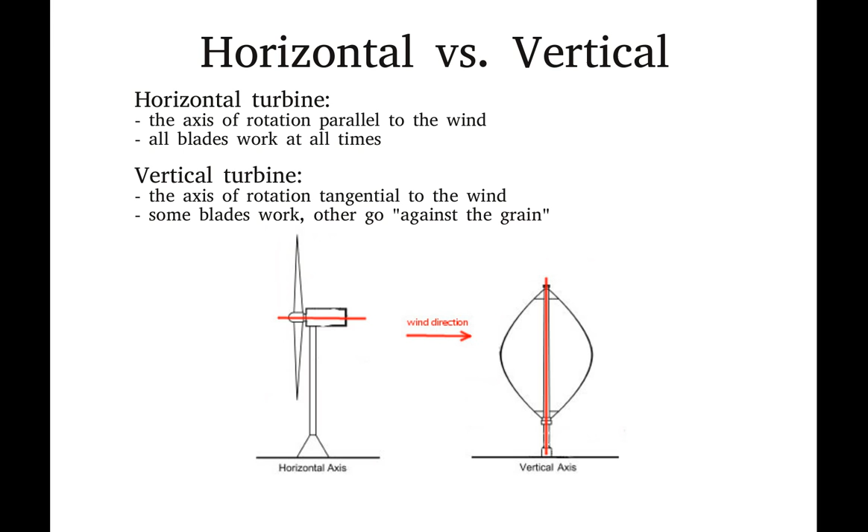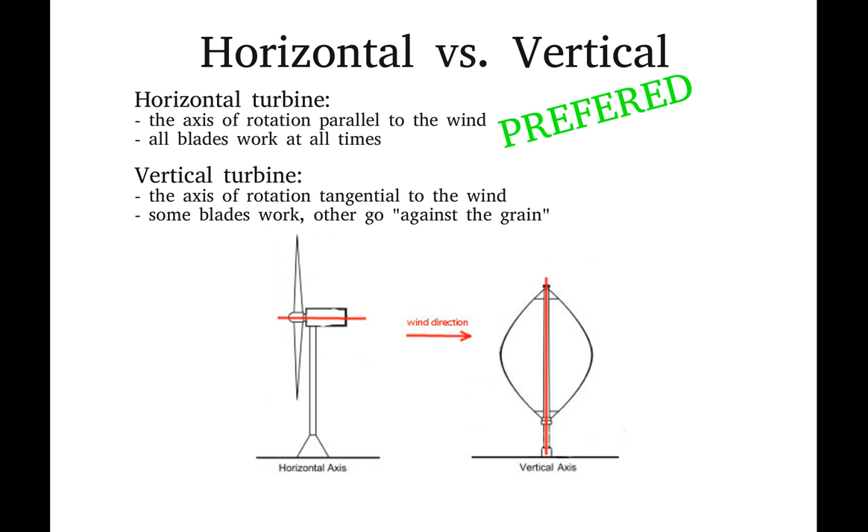The second type is vertical axis turbines. These turbines have the axis of rotation tangential, or at a right angle to the wind direction. What that means is that half of the blades or so always go against the wind, and effectively they are slowing the turbine down. The reason why they are often used today is that they are basically easier to design, but their overall efficiency is not very good compared to horizontal axis. So therefore, if you are aiming for the best of both worlds, you would go for a horizontal turbine.

Another way to distinguish types of turbines is by the mode of their action. They can be lift or drag powered. Lift action works as an airfoil, as a wing of an airplane, let's say. The incoming air is, in this case, lifting the wing upwards, which is responsible for the motion of the whole turbine. Turbines that are lift powered spin very quickly, and therefore they are very good for electricity generation.

It comes at a price. These turbines need quite high wind speeds in order to function, otherwise they just stand still and they don't work.

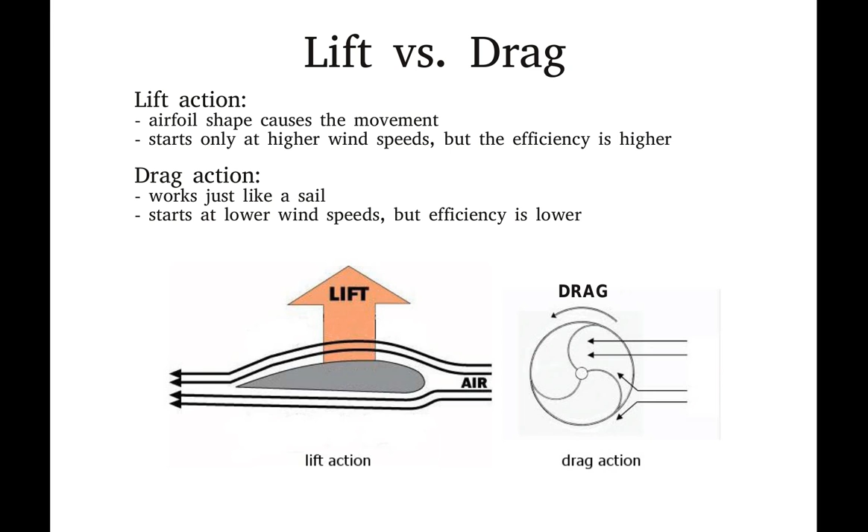Compare that to the drag action. Drag action is very easy. It's like a sail. Wind just hits it, and the blade moves away as far as it can, and therefore it rotates. It can start with lower wind speeds, and lower winds are more frequent on the face of Earth. So drag would seem like a perfect option. But these turbines rotate slowly, first of all, so they are not very good for electricity generation. And secondly, these turbines are not as efficient as lift-powered turbines.

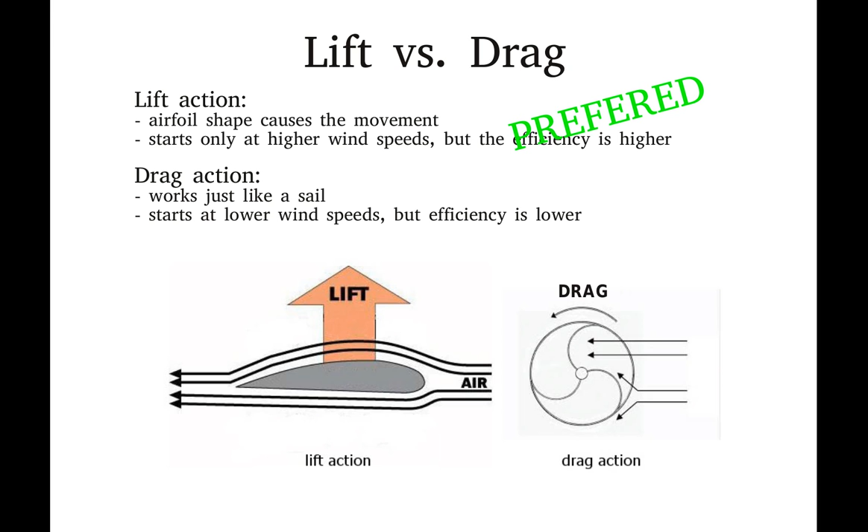So if you aim for pumping water, you would go for drag, because the difference in efficiency is not as high as compared to vertical versus horizontal. But if you aim for electricity generation, lift would be the choice. Okay, so the lift action. So far we know that if we want a perfect turbine for electricity generation from wind, we would go for a lift action horizontal turbine, right?

Now, combined turbines. There are turbines that can be both lift and drag powered, and they are the best the world has to offer so far. These are two turbines basically combined into one. The one in the center is a drag turbine. The one on the outside is a lift turbine. The slow wind starts the drag turbine first. That helps to start up the lift powered turbine on the outside, which otherwise would require higher speeds.

So what this does is that it starts spinning at lower speeds, and it goes all the way to the higher speeds that lift turbines are made for. It comes at a price. One thing is that you need to construct two turbines, and therefore they are more expensive. But that's not the most important part of it. The most important is that these two turbines slow each other down. They are in each other's way. And these turbines will never get to the efficiency of just one turbine in correct wind speed.

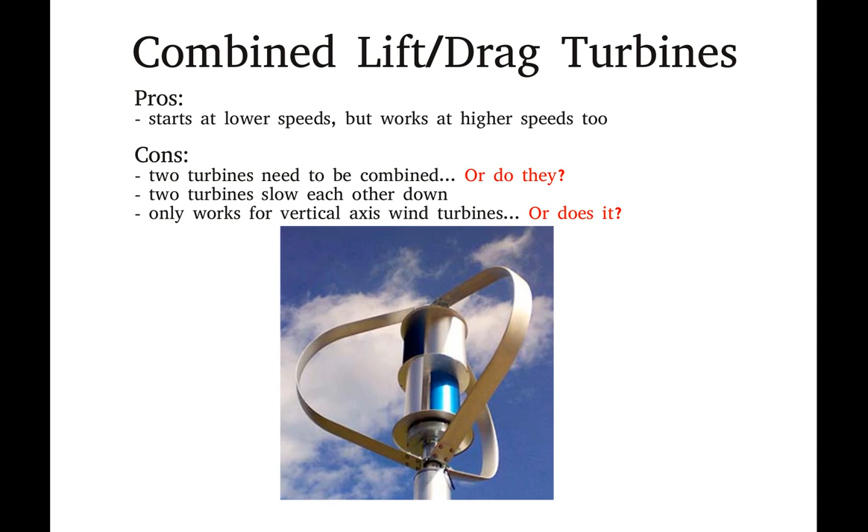Another disadvantage is that due to design, these can be used only on vertical axis wind turbines, or so far they have been. It is not true with my turbines. So let's talk about my turbines now. My turbines are also both lift and drag powered. On the left picture, the one with airplanes, you can see a sketch of my turbine from the front. It's drawn as if you would stand against the wind. The wind would hit you in the face. Okay, so this is how you would view this turbine.

Now, the blades are in the shape of an airfoil, the shape of the wings of an airplane. And if you look at how the airplanes are positioned, it just depicts how the airfoil is positioned. It makes the turbine rotate counterclockwise in this way. Just a side note, my turbine with two blades looks like infinity, and the interesting thing is that it looks so from the front and from the side as well. It's a very strange shape and very hard to grasp, but nonetheless that's the way I designed them, and that's the way they work.

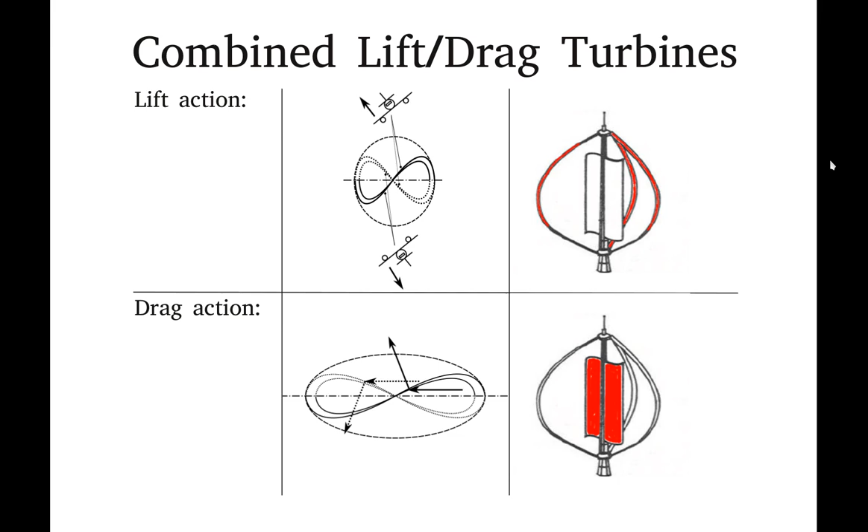At the bottom picture on the left side you can see the drag action. The upcoming wind hits the blade, and the blade is moved also in a counterclockwise manner on this picture. And these two principles, lift action and drag action, work hand in hand. They make the turbine spin in the same direction, and on a single blade, which is important to say. Unlike the turbines on the right side. They are just there to illustrate what portion of a standard turbine would be used for what action. My turbine does both actions with just a single blade. One or many, it depends on the design.

So far I was talking about how it starts. That's important because low wind speeds are more frequent than high wind speeds. But high wind speeds are also important. In standard turbines, they cause destruction. Energy grows enormously with increased wind speed, and basically wind turbines that are not braked explode in high wind speeds. That is why they are braked.

On the other hand, my turbine is designed so that it will not need to be braked, and it will just work in any wind speed, I suppose. Even if you get to the hundreds of kilometers per hour, it will just withstand that. There are two reasons for that. One of them is when you look to the diameter.

These two turbines you can see on the upper left side have about the same swept area of blades, but my blades are like twisted, so that, I should say they are like 3D. The one on the right side is flat completely, and it is also calculated. The formulas where you calculate the output and so on only count with the surface. They don't count with the depth.

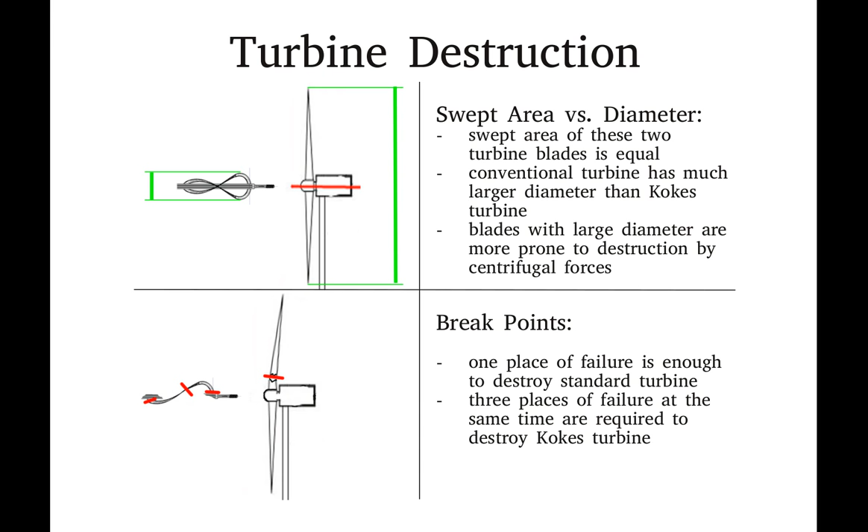There's another feature, and that is also in the design. In order to destroy an ordinary blade, you just need to break it in one point, and that's it. The whole turbine goes kaboom. But with my turbine, you need to break it at 3 places at the same time in order to break the wing. And I should mention that this doesn't mean that if for the one on the right side you need force 1, on the left side you need force 1 plus 1 plus 1, which means 3. No. It doesn't add like that.

It multiplies. So that means the one on the left side, to destroy it, you would need like 10 times or more higher energy. Depending on construction, it could be 10 times, it could be 100 times, it could be 1,000 times. So I will design them so that they will be able to withstand tens of thousands of RPMs. You may say that we don't have winds like this on the face of Earth, but that's another one of my designs. It's my tower.

It's going to have a funnel in it, and the turbine is going to be in a narrow section of the funnel. And what this means is that the funnel will concentrate the energy, and the wind will be much faster in the narrower section than in the wide section. So I'm aiming to increase the wind speed about tenfold.

Okay, so if you get into the hurricane, that's, let's say, 100 miles per hour, these turbines, without braking, could face speeds of wind of up to 1,000 miles per hour. And they need to be able to withstand them and to harvest energy from these speeds. While with this ordinary propeller type turbine, you get to 40 miles per hour or so, and that's it. You need to brake it, otherwise you will lose it.